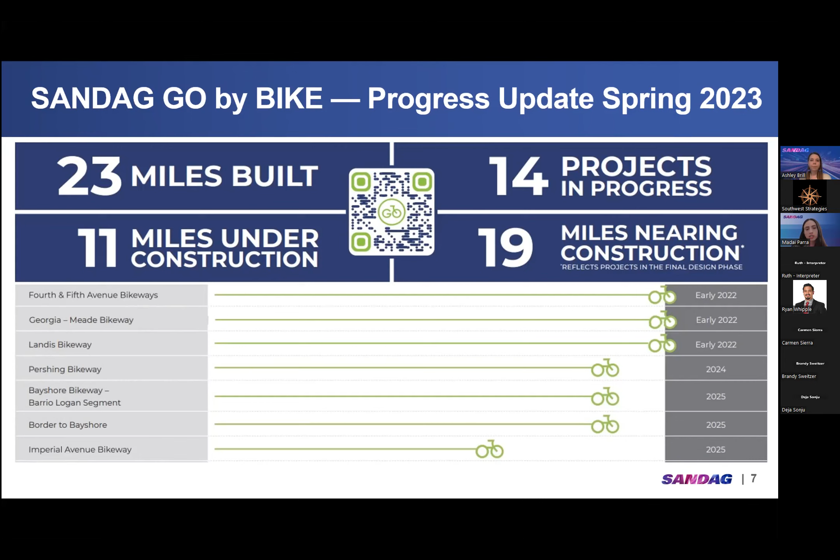Now we have an update of the miles of bikeway projects built in the region. In the San Diego region, we have 1,715 miles of bikeways, and 23 of those miles recently have been built by SANDAG. Next up for construction is more information and some notable project features in the upcoming slides of the project.

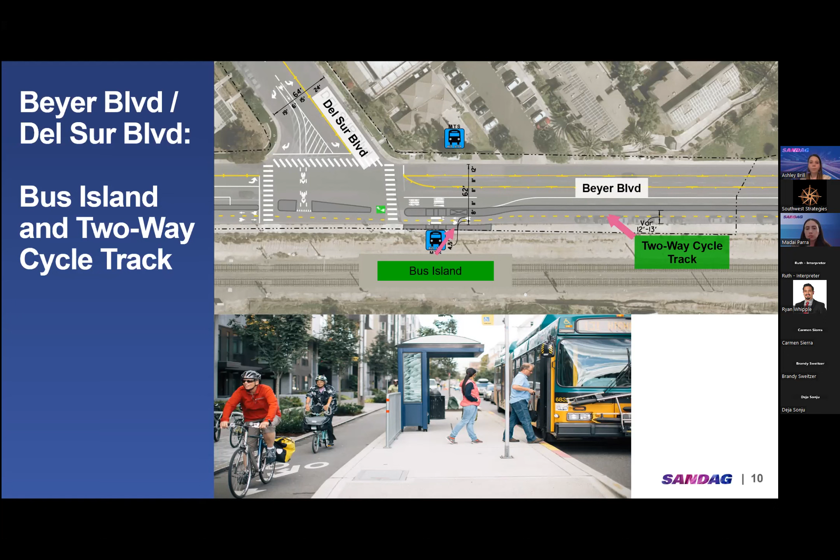Next we have another project location that we wanted to highlight: the Beyer Boulevard intersection with the interchange at 905 and Iris Avenue. The image before you is an example of a protected intersection best practice, and there are different design features here that we wanted to highlight. This is an example of a protected intersection.

This is a very busy intersection with traffic coming in and out of the 905 freeway, and also folks coming in and out of the Iris Transit Center from Iris Avenue. There's also a supermarket nearby, which tends to get quite busy.

So the idea here is to provide smaller walking distances from intersection to intersection, and creating physically protected intersection crossings alongside crosswalks to increase safety and comfort for people who are biking and walking.

Also, providing protection via physical separation barriers and dedicated or leading bike signal facing is another component of protected intersections. We're also reducing vehicle speeds here by reducing the turning radii, particularly from Beyer into Iris Avenue. Reducing vehicle speeds will also increase visibility of people who are crossing the street and those using the bike lane.

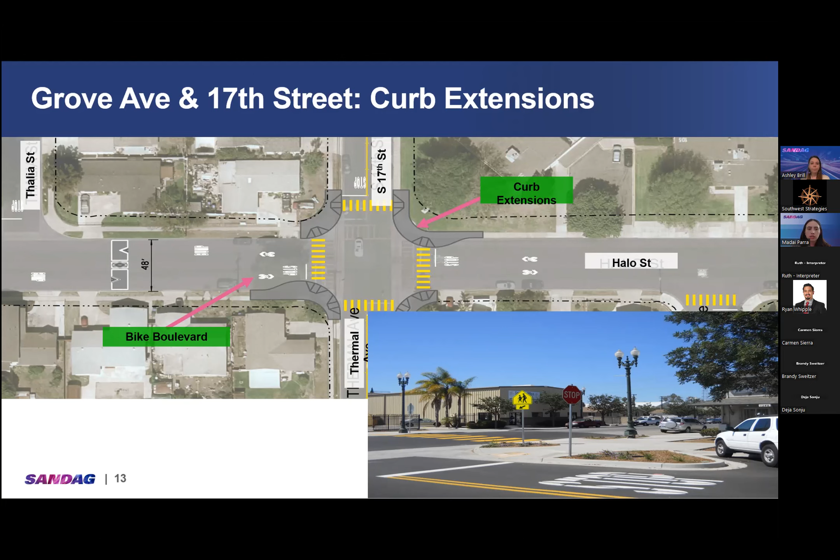The use of color is also proposed on the bike lane, differentiating the route so that people biking or scooting on the bikeway can identify their spaces and further delineate their right of way. Drivers can then know that there are pedestrians and cyclists at that intersection, which is a potential point of conflict. Likewise, the extensions of the sidewalks can serve as an added layer of protection for cyclists and pedestrians.

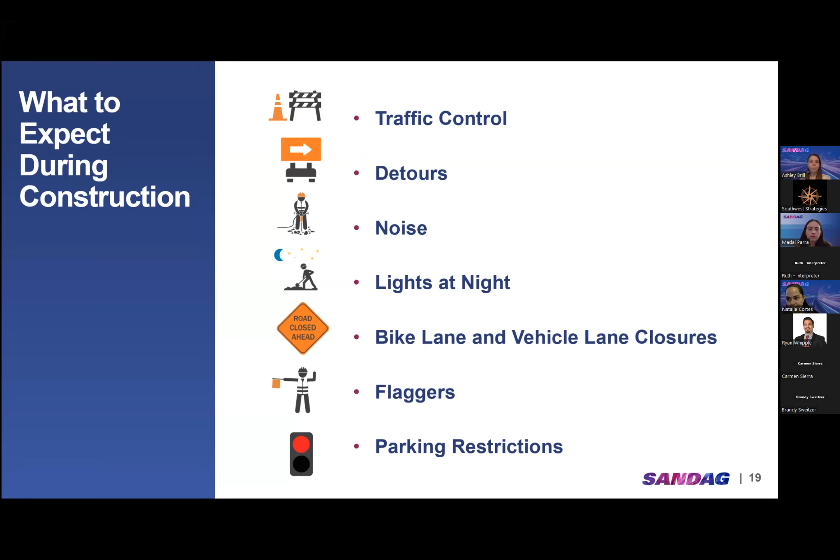And with that, I will pass it over to Natalie Cortes, and she will give you some updates on upcoming engagement opportunities.

Hello everyone, as Madai mentioned, my name is Natalie Cortes, and I'm the communications lead for the Border to Bayshore project. Madai covered several exciting parts of this project, and as community members we want you all to feel informed about the Border to Bayshore project and other bike initiatives. So I'm going to quickly share some opportunities for you all to get involved and engage with us.

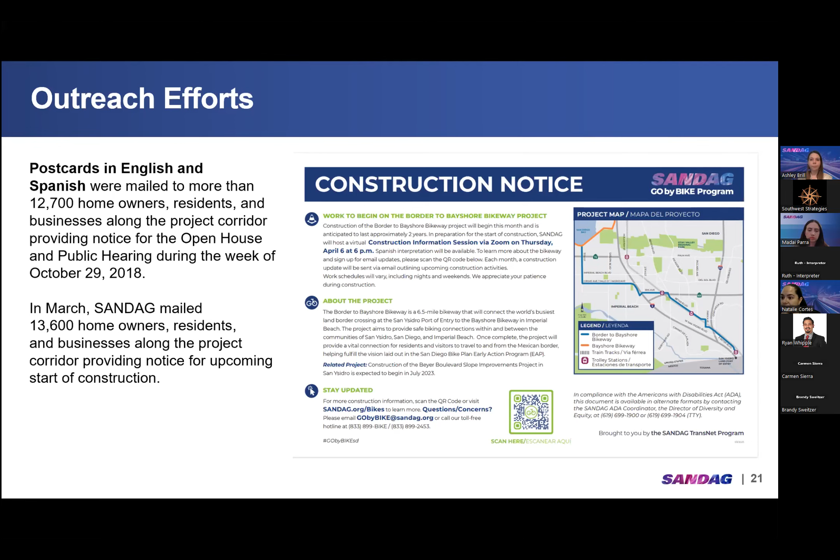The first being our groundbreaking. You'll see in the next slide.

We want to officially invite you all to attend our Border to Bayshore groundbreaking event, which is Thursday, May 4th at the San Ysidro Civic Center. This is your opportunity as community members to come celebrate this historic project with us, engage with the project team, and hear from community leaders on why this project is so important. This event will take place at 10 a.m., and we will be providing some light food and beverages for you all. We hope to see you there.

Following this meeting, we will share more information about the event and how you all can RSVP, so please stay tuned for that. And the last opportunity I wanted to share with you all is our reoccurring bike event.

Formerly known as Bike to Work Day, we have now expanded this event to be Bike Anywhere Day. This is really an opportunity for you all to celebrate all of our bikeways beyond just the Border to Bayshore Bikeway. We have expanded this event to include people of all ages beyond just commuters, so we're really encouraging students, families, and bike enthusiasts to go by bike. This event is meant to show that biking can be an easy alternative to short car trips - instead of driving, people can bike to the park, the beach, work, school, or local restaurants.

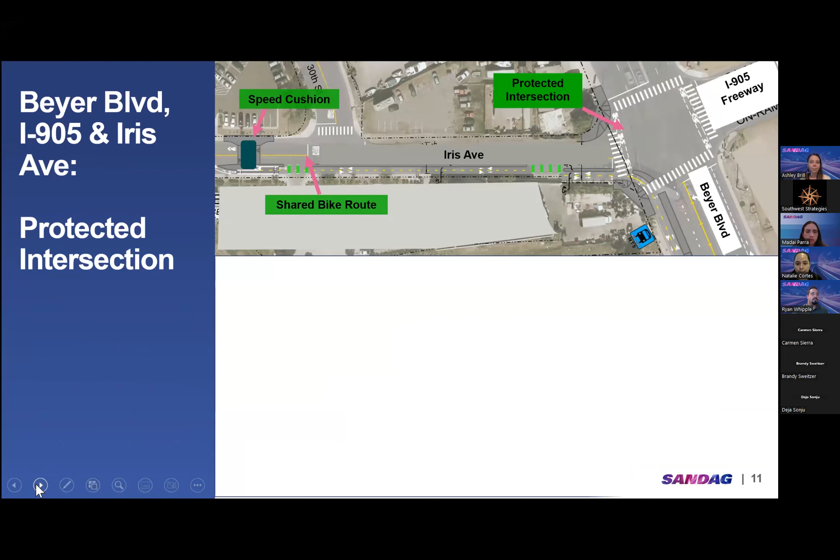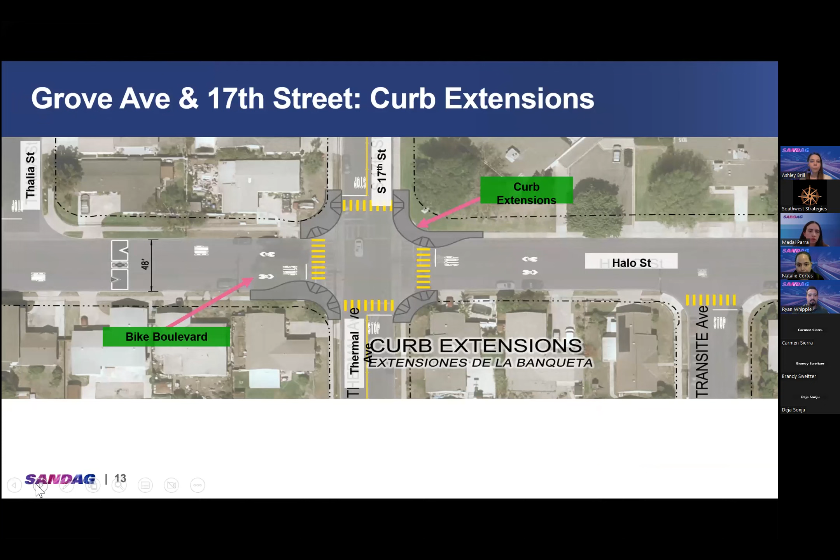Perfect, and we're getting a few more. What is the plan for 13th Street and Palm Avenue in Imperial Beach? This is a very high volume intersection. Let me go to that slide. So the project is proposing, and that was Palm Avenue and 13th, did I hear that correctly? Correct, so let me go to that slide here for a second.

Sorry to jump in. No, that's okay, I was just thinking the image I had was of Palm, but you're right. We will be including the bend-out treatments, similar to the images we have here below, the renderings below.

Perfect, and I think on a similar note, this resident asked: will the traffic signals, especially at 13th Street and Palm Avenue, get bicycle detection improvements too? Yes, we're using both loop and push button detection at those signals, so there will be multiple ways for cyclists to be detected. Wonderful, all right, this is great. Please keep them coming, everyone.

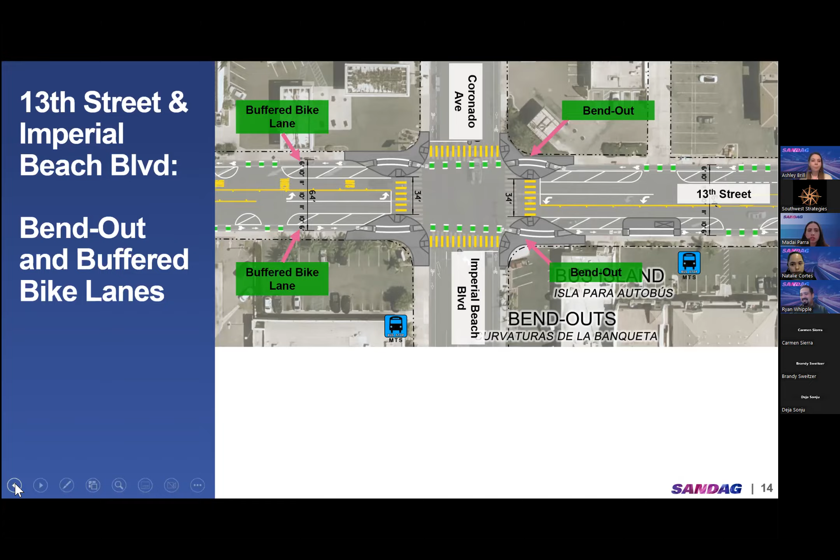I can jump into that one. The delineators and separated protection along Beyer Boulevard, for instance, is actually going to be a raised median. We do not have plastic delineators in the middle of the bike lanes because we are using the raised median to separate that out. There are signs posted to not enter the two-way cycle track facility, and it's designed in a way to discourage vehicles from entering that space.

Do we have an idea of how much parking will be lost? There was a preliminary parking assessment conducted in 2018, and it does reflect the parking loss throughout the project corridor. We're happy to provide more detailed information about that. There is some parking loss, but there's also some parking gain at different portions of the project since it's extensive, almost 7 miles. So there are losses in some areas, gains in others, and some locations with a net zero change. It's fluid as it changes at different portions of the alignment, but I'm happy to follow up with specific location information.

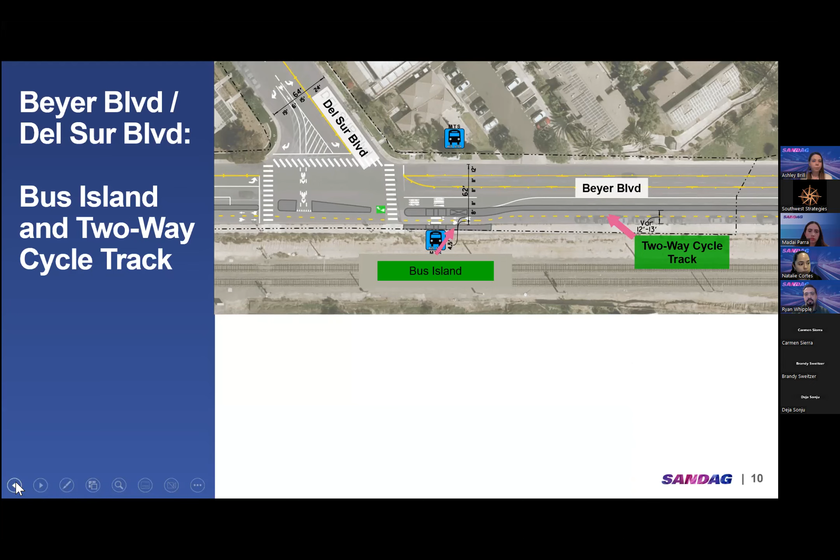We're getting some more questions in. This one's a little vague, but it was a request to provide more detail on the section between Beyer Boulevard and East Beyer Boulevard. If you take a look at the route from Beyer Boulevard, it actually descends down Park Avenue over to Hall, and then it crosses 805 via the pedestrian bridge over 805. So it doesn't connect all the way down Beyer to East Beyer — the pedestrian bridge is being utilized as the connection point onto East Beyer. That's how Beyer Boulevard connects to East Beyer, via the park and rec center on Park Avenue and then the pedestrian bridge.

Will there still be parking along Beyer Boulevard available, or is that getting displaced by the bike lanes? There is still parking available on Beyer Boulevard. There is some impact to the total number of spaces, but there will still be parking available.

Thanks, Ryan. Will all signalized intersections have bike signals? The majority of the signalized intersections on Beyer Boulevard, as well as 13th Street, will have bicycle signals. There is not a bicycle signal at East Beyer Boulevard with San Ysidro Boulevard, or at Hollister Street with Grove. Otherwise, all the other signals will have bicycle signals.

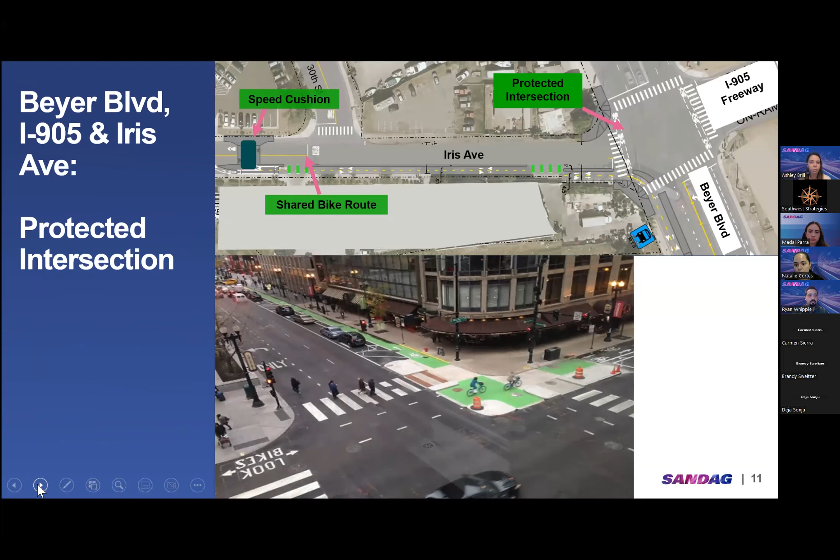Oh, there's more. I regularly skate this route with wheels that are more sensitive to this. However, I'm sure thinner road tires are also affected as well.

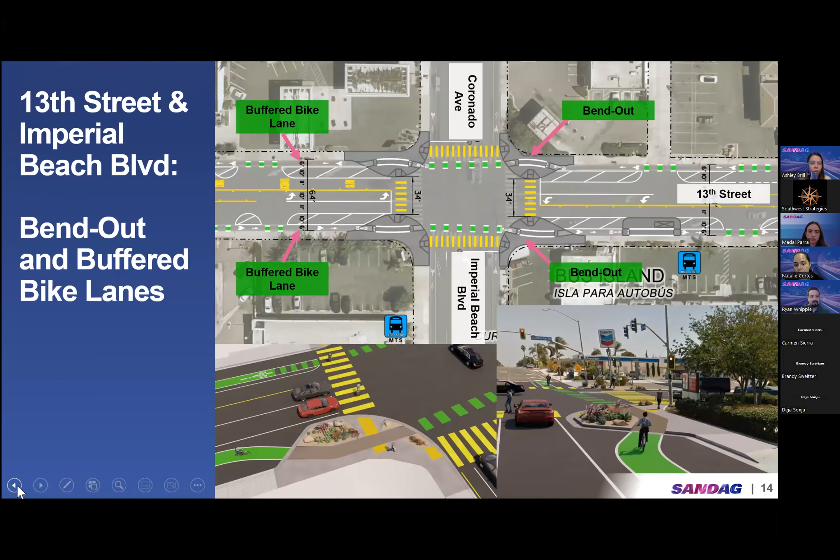We will have an answer to this. I don't have one, it's a little outside my scope of practice. Marie, do you have an answer? No, I looked at some of the trees we're proposing in terms of whether or not they have invasive roots, but I'm not a landscape architect, so that's also not my area of expertise. But if we have this person's contact information, we're happy to provide that before the end of this week, with more detail on the roots of the plants and trees we'll be planting.

Perfect. And we will follow up after the meeting. All right.

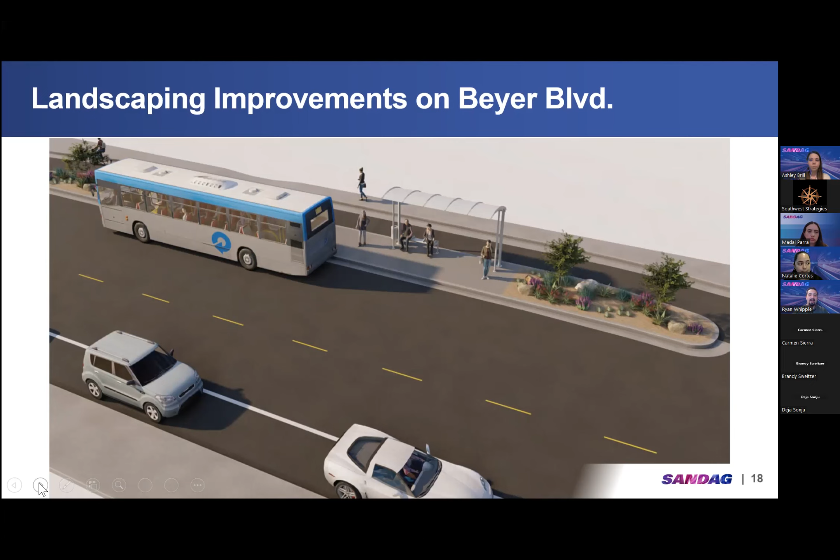This person asked if the Catholic school on Seward and Park Avenue traffic was taken into consideration. Yes, the traffic circle there shouldn't preclude what's operating currently in terms of being able to access the area, so it was taken into consideration. That's the short answer. At that location, all movements are still able to be made. It's a constrained right of way, so there's not a lot of room to work with, but it shouldn't change circulation patterns.

And then I believe this might be the last one, at least with this first batch. Why not Iris for the east-west route? Saturn connects to Coronado, which has bike lanes in place. So there is a portion of Iris that is selected, from Oro Vista to Beyer Boulevard, and that portion was selected for connectivity.

So I'm not sure about additional routing. Could you repeat the question again, Ashley? Yes. Apologies, I just lost it. Oh wait, I see it. Why not Iris for the east-west route? Saturn connects to Coronado, and that has bike lanes in place.